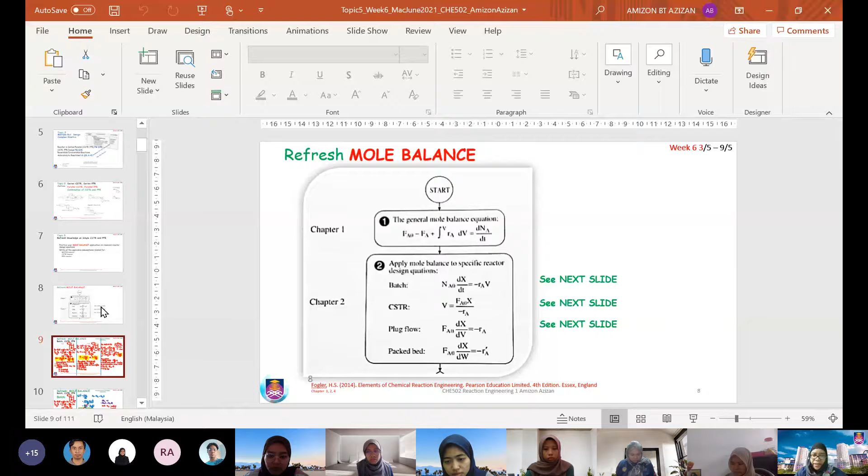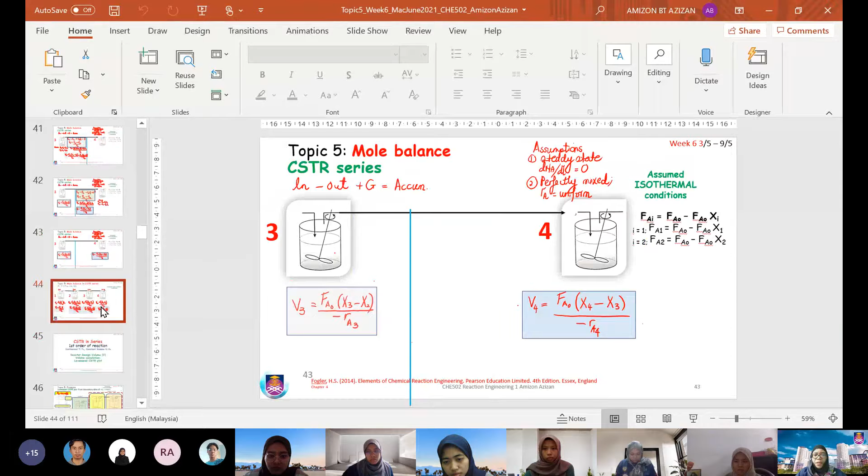All right, so we will start with the class now. I will share my slide. I hope you can already see my slide. I will go straight to the last slide we covered for your class, EH2204K, and I think we stopped here. If you have your notes, maybe you have your scribble on it, and you may remember where I stopped, but I saved it so I know where I stopped.

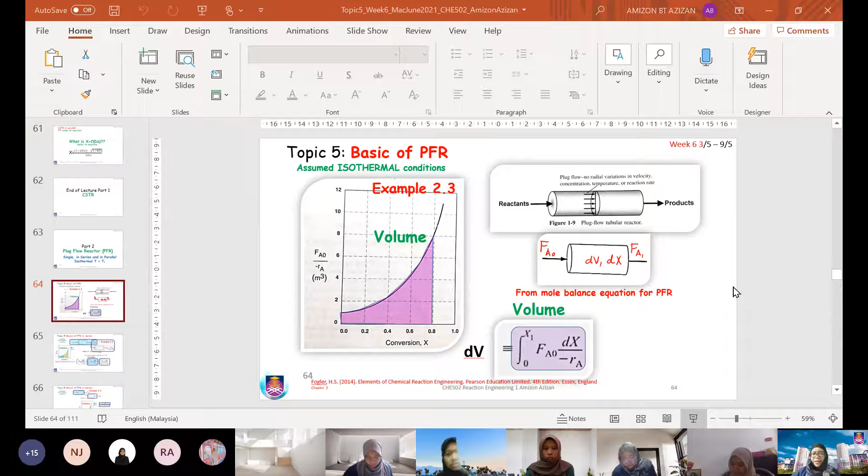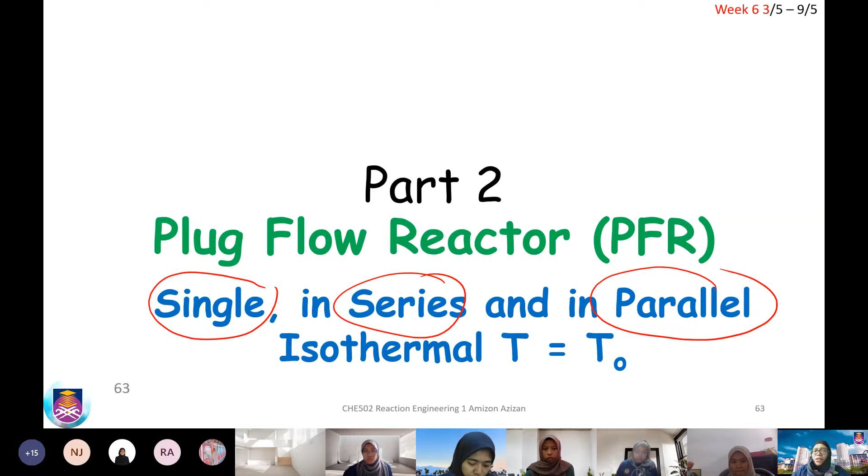Before I proceed, this is part 2, plug flow reactor, PFR, for single, series and parallel configurations. We are going to look into the comparisons between single, series and parallel. I'm going to make it very fast, because we're going to finish part 2 and part 3 today, the second part of the lecture.

After that, I will show you one of the exercises. I will give you some time to scribble your answers, then we will have a Kahoot on that question. Tengok siapa yang jawab betul. But it's very easy. My opinion about this topic is that it's totally easy.

If you understand it correctly, it should be at your fingertips. And kalau you still feel masih lagi susah dan lambat, susah nak fokus, so there's something wrong with something else. Most probably you have to practice listening to English, or practice listening to fast communications, or practice reading a lot more in English, because the engineering questions for topic 5 are very straightforward. All right, so we will proceed. This is a PFR.

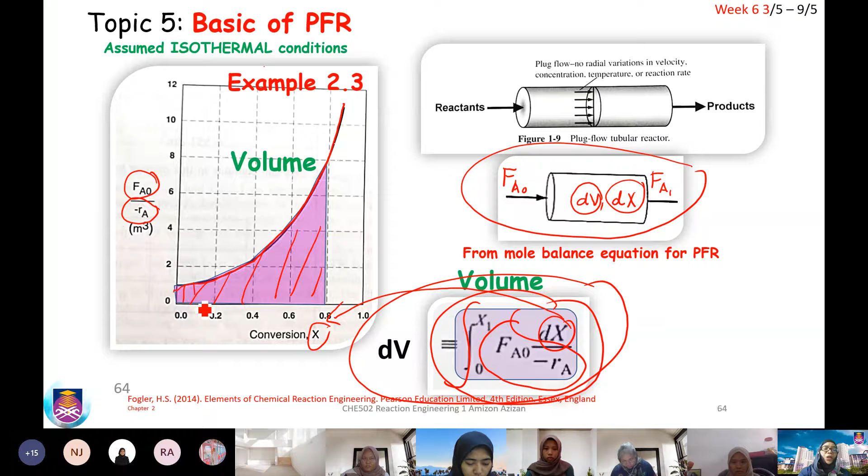As you know, to determine the volume of the PFR, we will use the integral form, and therefore having that plot of dx versus the initial molar flow rate to the reaction rate will give you an ascending trend, whereby in the plug flow reactor there will be change in the x and also the volume. To determine the volume, simply by the understanding of the integral form mathematically, you can decide the area under the curve. So this is what we're going to do.

And now we are going to compare it with, let's say, two PFRs in series, PFR number 1 and PFR number 2. You have initial flow rate FA0, then FA1 coming out from reactor 1, then it enters reactor 2, and here you can write it as FA2, a little bit of typo there, FA2 coming out from reactor 2. So we have two integral forms. If you use the same plot by the variation of x, the conversion, the x for the first plug flow reactor is achieved at 40%. Then after the second plug flow reactor it will increase to 80%. So we have 0.4, 0.8.

So to determine the volume, the total volume of PFR1 and PFR2 is simply the addition of the, sorry, hold on.

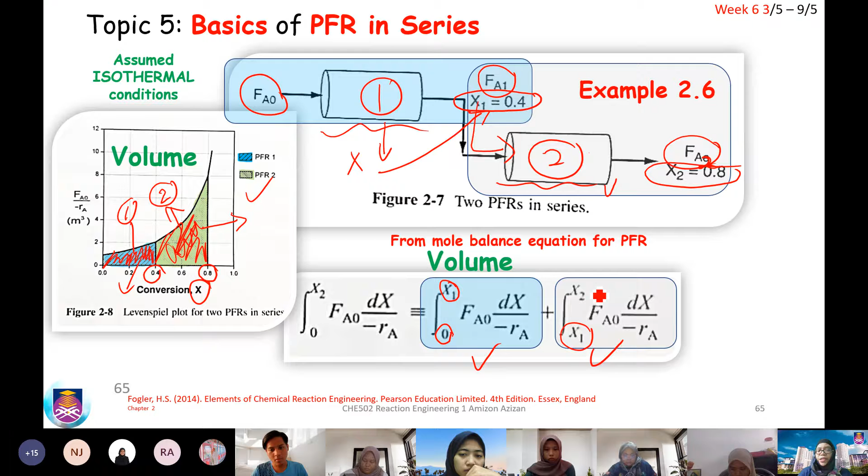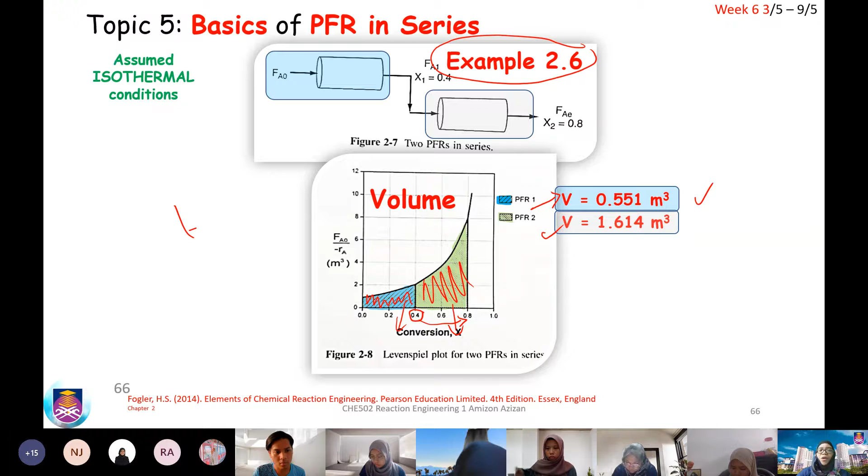Now, to speed up, you can read from your Fogler 4th edition, example 2.6. The calculated area under the curve would give you the first volume 0.551. The second volume is 1.614 meter cube. So you can see that volume 1 is lesser than volume 2. If you go from conversion 0.4 to 0.8, it needs more volume in comparison to 0 to 0.4.

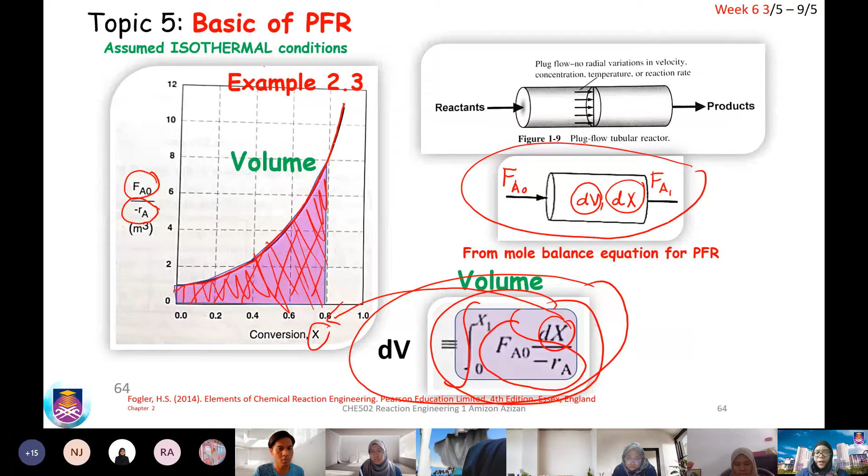So now you can say that if you compare a single PFR to series PFRs, the total volume as calculated is the same. Let us go back, did we do that before? It is not shown here, but the single one will give you the same volume, which is on slide 67. So the calculated volume for a single PFR is the same as the two series PFRs.

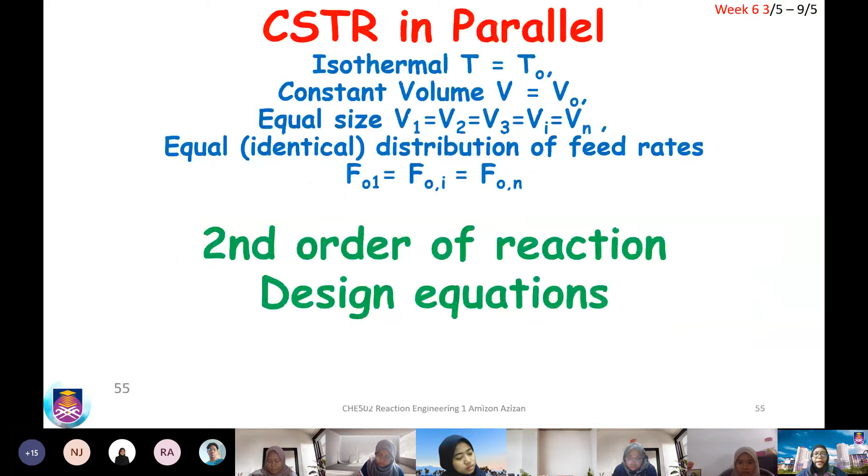In comparison to our CSTRs in series, if you go back to our previous slide, not sure which number, but I'm gonna scroll back. All right, this one, page 47, the single CSTR volume is way higher than the series CSTR volume. So you can try this from example 2.2 and example 2.5 for CSTR.

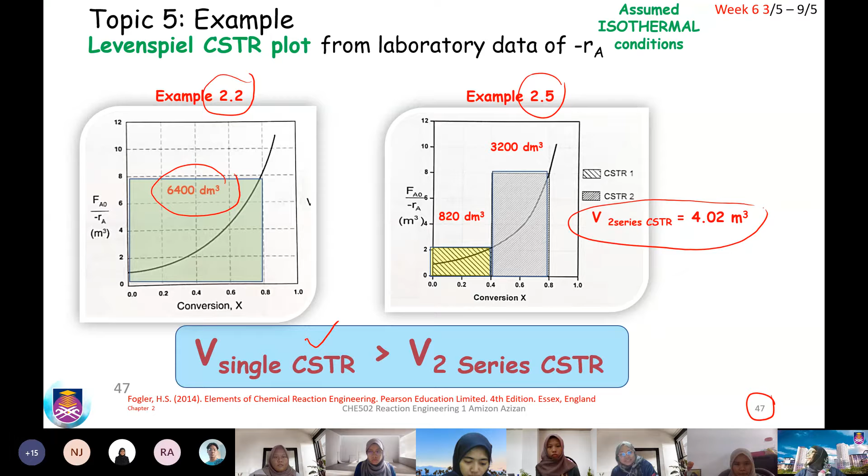All right, Afsar, okay? Shafika, okay? Nada, okay, no Nada. Okay, then.

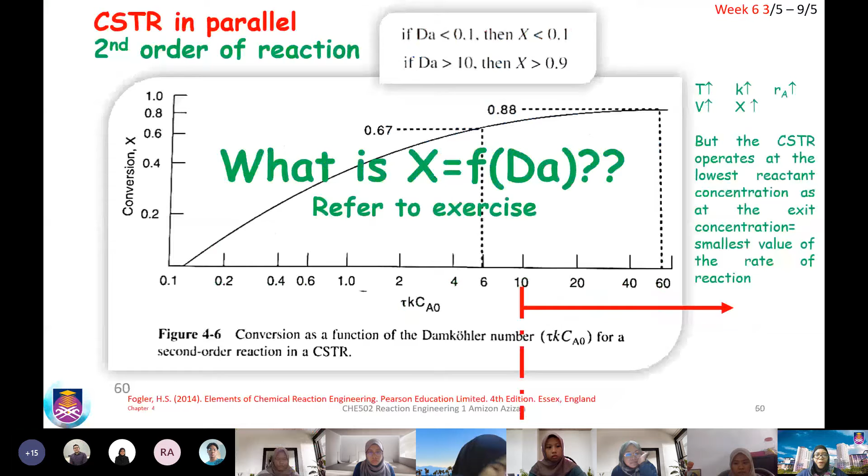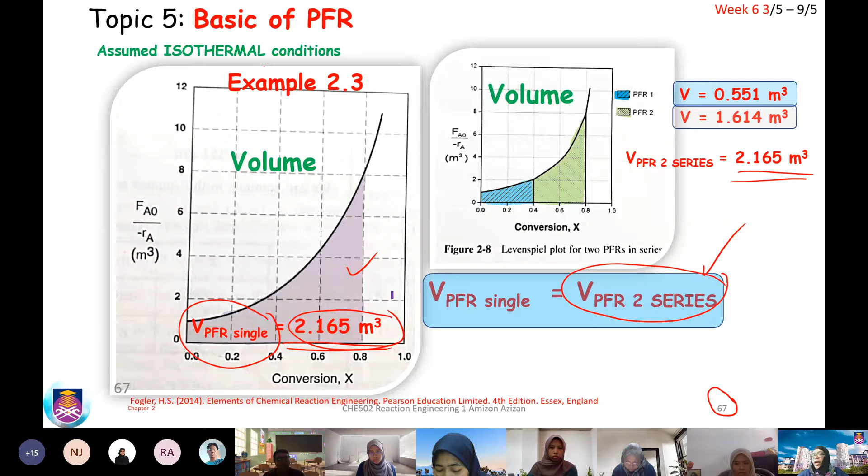All right, thank you. So we are going to go forward to the last slide, which I touched. This one. So now we're going into PFRs in series in writing the formula. Basically, I started with showing you the calculated volume based on the area under the curve. So here I go into detail how we do that. We normally start with the formula, which you have done for the last few weeks, the derivation of the formula, and you know that the volume is simply the integral form.

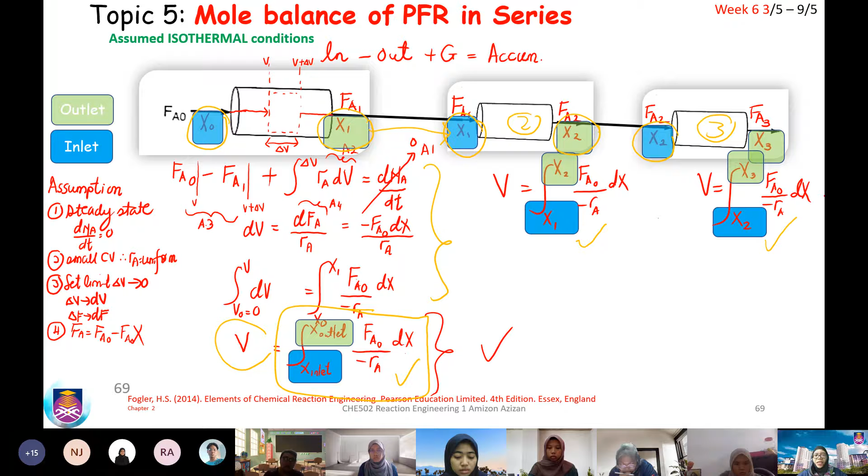So this is just an illustration of the inlet with x0, then the outlet, the green shaded x1, then x1 becomes the inlet now. I purposely changed the color of the inlet and outlet to make it clearer. So we have X2 as the outlet from reactor number 2, which becomes the inlet for reactor number 3. So you have those series of formulas for the respective reactors in series, reactor 1, 2, 3.

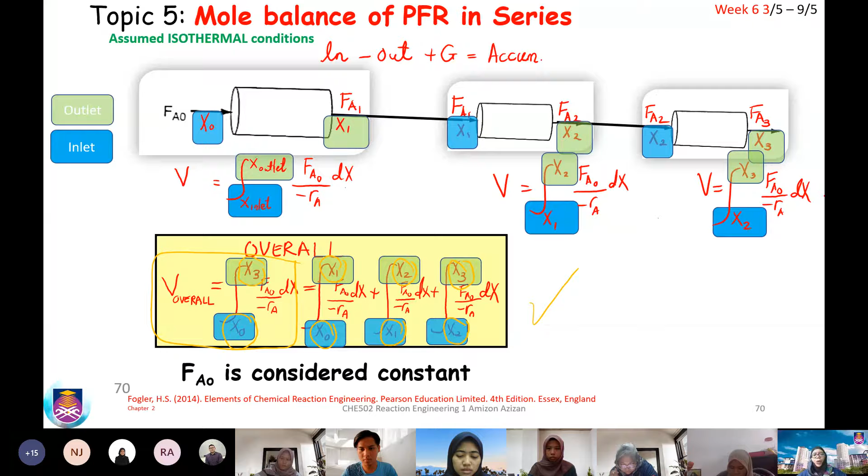All right. This slide 70 is just summarizing the formula that you have for the series. For example, here we start with x0 to x3, that would be the overall. It's simply the addition of the integral form for the first reactor from x0 to x1, then from x1 to x2, then from x2 to x3. So please do understand how you write the integral form in series respectively.

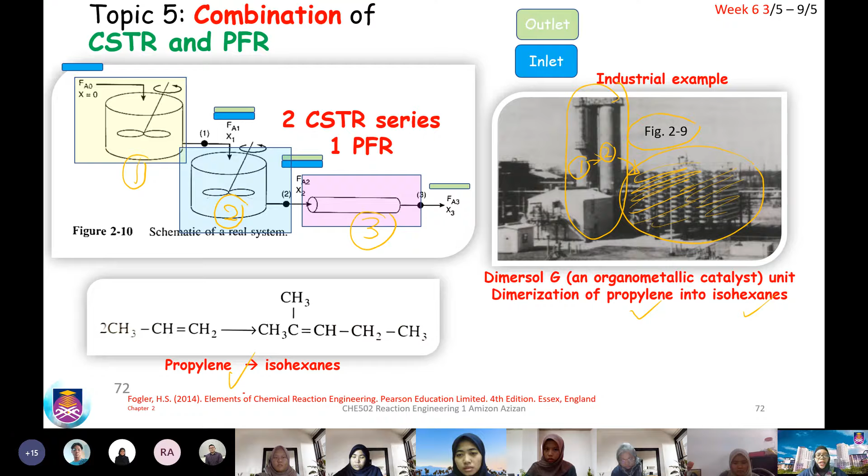So this is done for the Dimersol G organometallic catalyst unit. It's a dimerization of propylene into isohexanes. Another example of the application of a combination of CSTR and PFR is propylene to produce isohexanes. So this is what you see as an engineer. You know that you're going to design two CSTRs with the PFR. Now you need to know what would be the size of both the CSTRs and also the PFR.

So we have learned earlier the basic formula for the CSTR is the initial flow rate with the initial conversion, which is 0, over the rate of reaction inside reactor number 1. Then if you need to achieve a certain conversion for the first reactor, you multiply it with X1 for reactor number 1. So we have FA0 entering, then FA1 leaving. Then FA1 is now the inlet for reactor number 2, volume V2, with targeted conversion X2. And you have the outlet as FA2 with the targeted X2.

So therefore, this is where the series principle formula is used for the volume calculation. So we have FA0, still FA0, divided by the rate of reaction in reactor number 2, times the outlet targeted conversion minus the inlet conversion achieved from the first reactor. So it means X2 minus X1. All right.

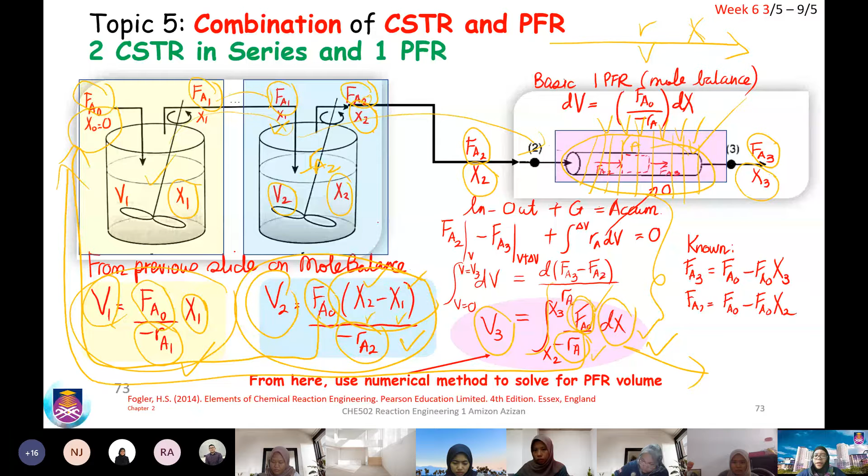Since the second reactor is a CSTR, you do the same thing, X times Y. So how do you determine it? Since you choose this one as the targeted X, X2 for reactor number 2, that point will give you the Y value.

And now the third reactor is PFR. Since it's a PFR, we simply determine the area under the curve. So how to do that? You have to use the numerical method, which you learned in our previous class. So this is mentioned in slide 73: use numerical method to solve for PFR volume.

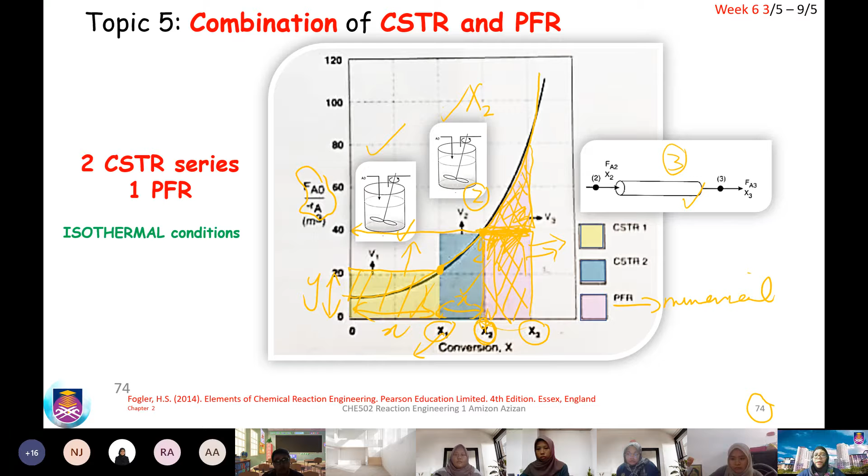Alright, so this is an illustration of how you write the formula. The first formula, the yellow shaded area for reactor number 1, is the volume formula for CSTR. The second one would be the volume formula for the CSTR again, since we designed it as such. And the third one is the formula for the PFR. So this is what I'm going to test you today in Kahoot. A very simple one, so please take note. Should be very easy. Do you have any question before I proceed?

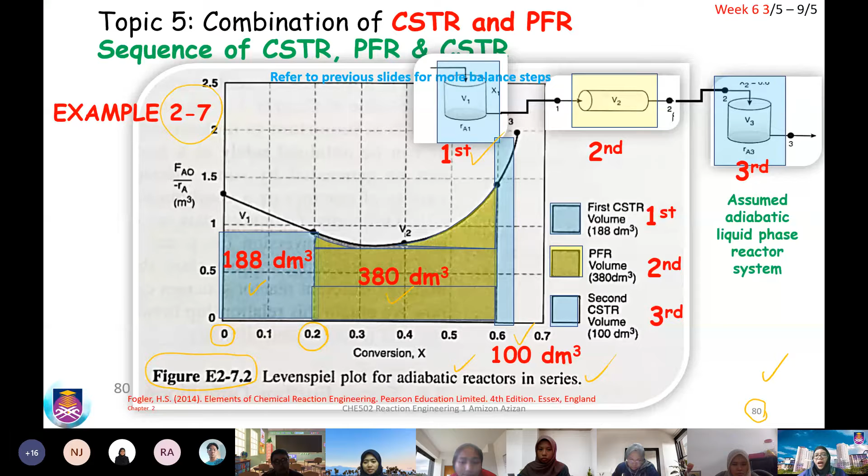And on slide 80, we tried it with the CSTR as the first reactor. Why not try a PFR as the first reactor instead, to achieve the same conversion of 0.2? Logically, if you compare based on volume, for the PFR we have to add an additional area there. For the CSTR, we just need that shaded area. So the total yellow shaded area is way bigger than the blue shaded area.

All right, do you have any question here? So we can say that the volume for the CSTR is lower than the volume for the PFR. Do you have any question there? That is our first conclusion. If you were to compare between the two types of reactors in the sense of volume, then you may say we need higher volume if we use a PFR rather than a CSTR, with that range of conversion.

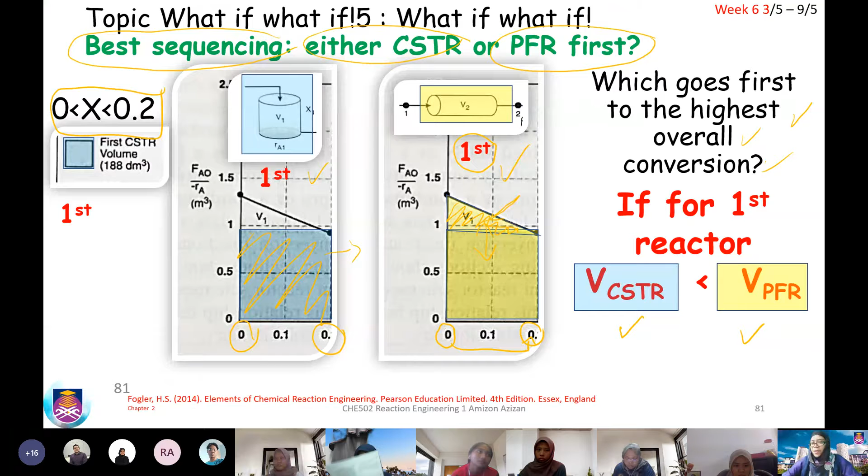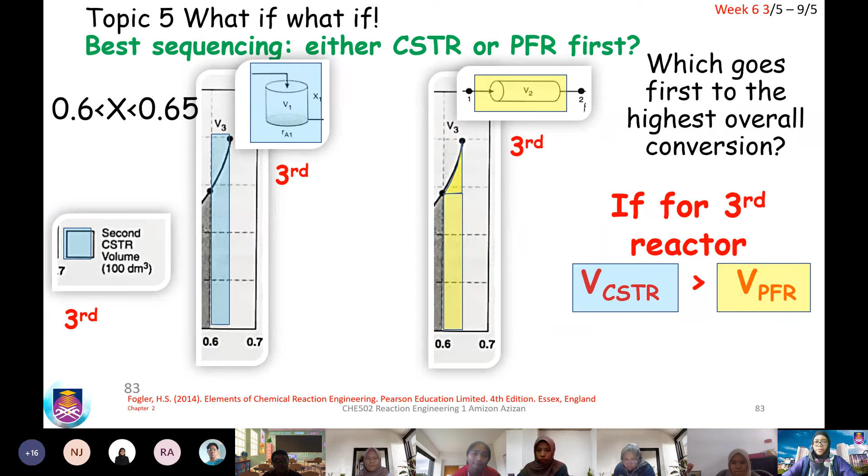All right. Then we go to the next one. For the third reactor, we earlier chose the CSTR. Now, if we were to choose a PFR from 0.6 to 0.65, you can say that the volume for the CSTR now is greater than the volume for the PFR needed for the third reactor for that range of conversion.

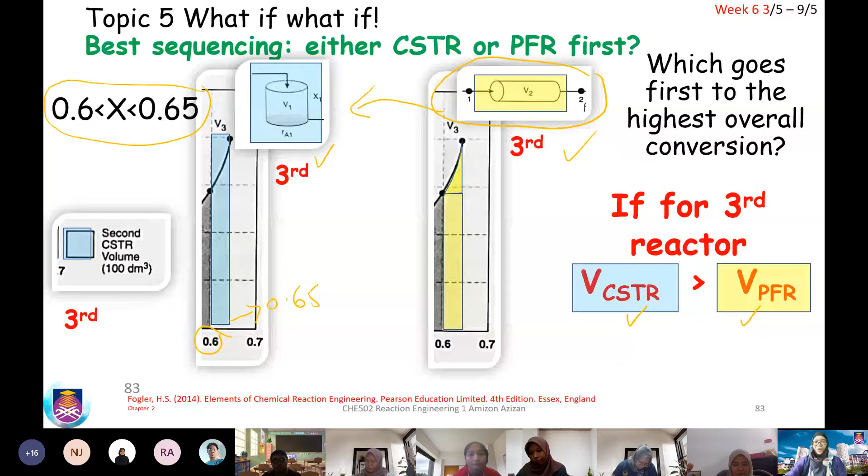Okay, Mashita? Najwa, okay. Okay, Doktor. All right. So, I'm going to proceed with part 3. If you have no questions... you have any questions?

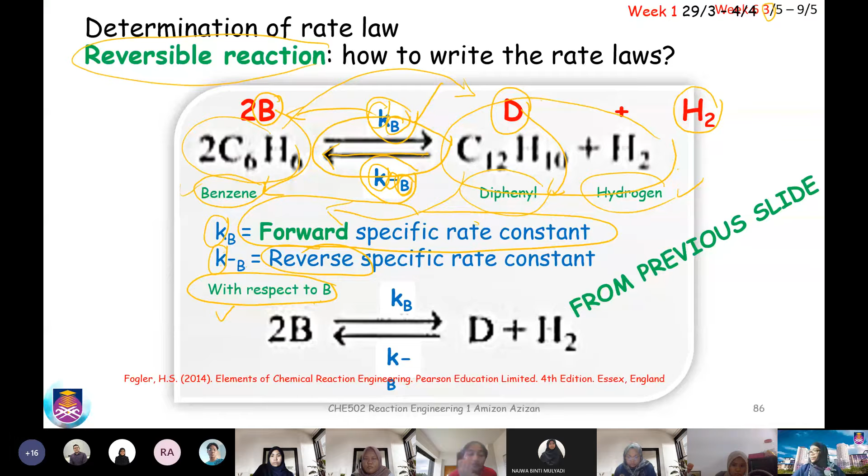Now, this is again from our previous slide in week 3. Take note of how we write the rate of disappearance for the forward reaction. So the rate of disappearance of benzene forward is simply Kb times, since this is elementary, Cb, the concentration of benzene squared, because we have 2 moles, all right?

For the reverse, we bring the negative sign to the right, because on the next slide we want to add that to the net rate of formation of benzene. It's simply RB forward plus RB reverse, without the negative sign there. That is why this equation is purposely written, so that you can substitute it into the net rate of formation equation.

For the rate of formation in the reverse reaction, you do the same thing, but now we use K minus B. Since it's reverse, the reactants are now diphenyl and hydrogen. So we have CD to the power of 1 for 1 mole of diphenyl, and the concentration of hydrogen to the power of 1 since there is 1 mole of hydrogen. Okay. So simply substitute those 2 equations and you'll get your net rate of formation equation.

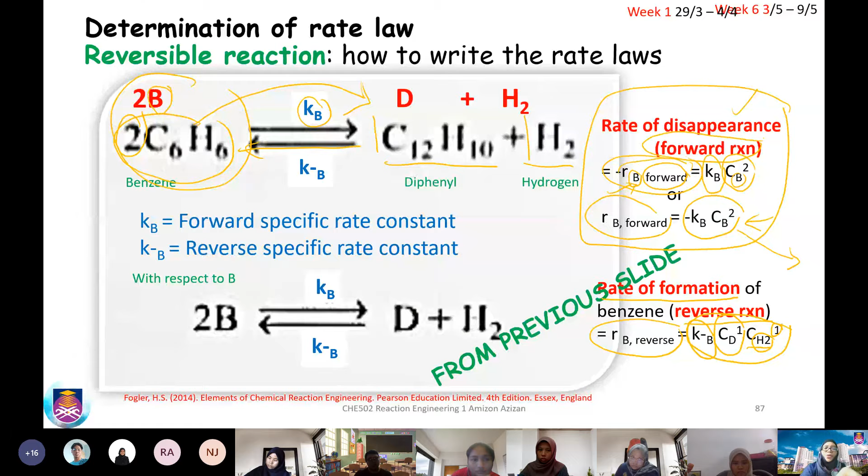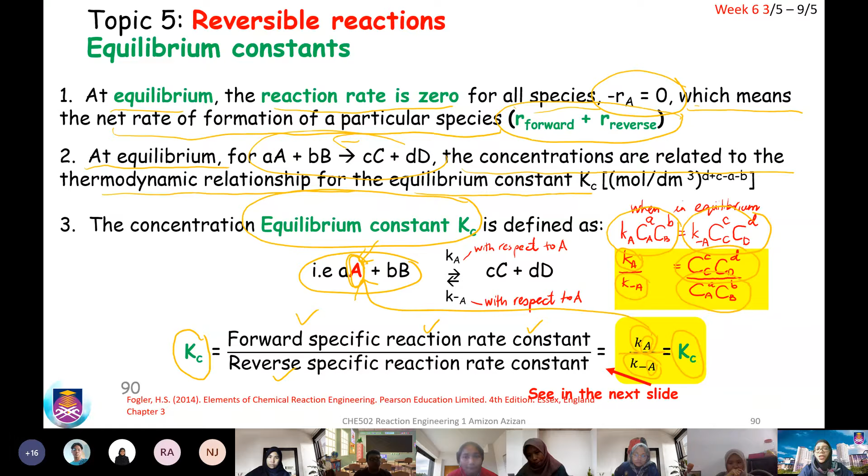So in a reversible reaction, what happens at equilibrium? At equilibrium, the concentrations are related by the thermodynamic relationship for the equilibrium constant. At equilibrium, the reaction rate is 0 for all species, which means the rate of formation of a particular species is R forward plus R reverse. So this is how you write the equation for capital K, the equilibrium constant.

Since the equilibrium constant is that ratio of rate constants with respect to A, we now write the rate of reaction with respect to A. Since it's a reversible reaction, you write it based on the net rate of formation, simply adding R forward plus R reverse, and rearrange it so we can write it with K, the rate constant with respect to A. Then you have this ratio, which is simply the reciprocal of the equilibrium constant.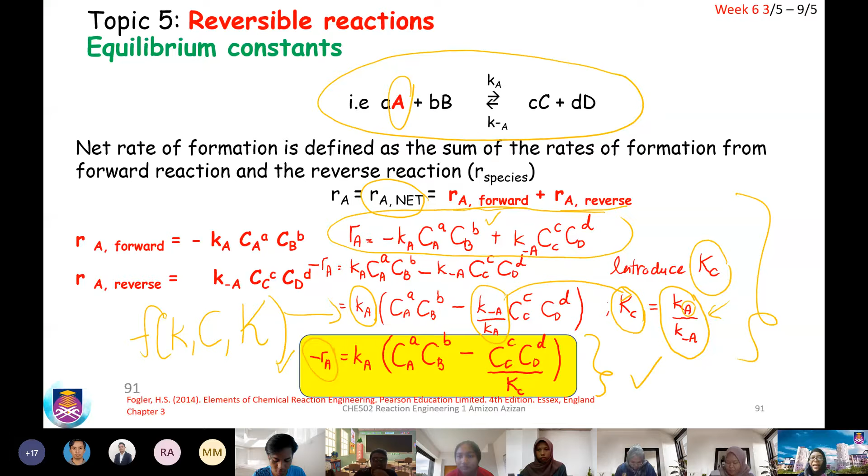When we talk about reversible and non-reversible or irreversible, basically for any reaction, we know that through time the concentration of the reactant will decrease, and at the same time the concentration of the product will increase. You know that, right? But in an equilibrium, the forward and the reverse will meet up at a certain time, according to the reaction rate. Both represent the happening in any reaction, but the right hand side represents the reaction rate according to time. So until a certain time, the forward and reverse will meet up, meaning it will reach its equilibrium state at that particular time. All right.

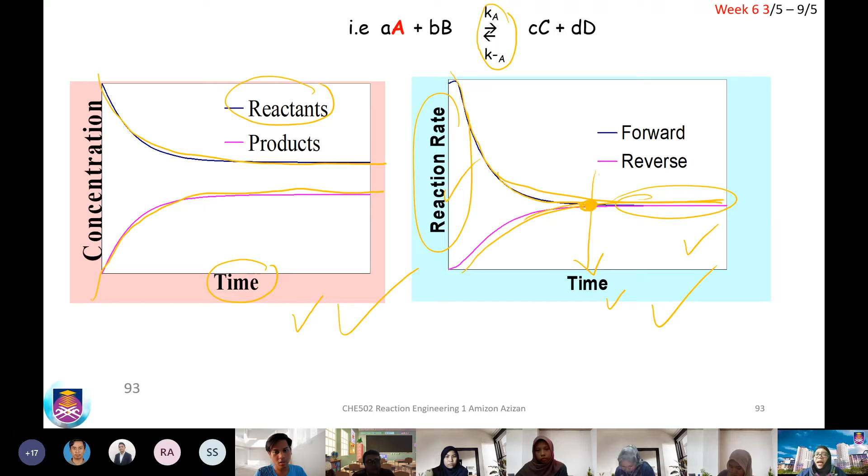This slide 94 shows how we write the equilibrium constant. The first one is based on Kc, which is the concentration equilibrium constant. The C here refers to concentration. Then the P here refers to pressure. So we write it as pressure equilibrium constant, and Kc is concentration equilibrium constant.

You know that for any gas phase condition, the concentration of the gas is actually the partial pressure. So if you are dealing with a gas condition, then you may write the equilibrium constant based on pressure, which represents the concentration of the gas itself. We'll still write based on K forward and K reverse. Doesn't matter if it's concentration equilibrium constant or pressure equilibrium constant, but the equation here is what you wrote earlier for the forward reaction and the reverse reaction respectively.

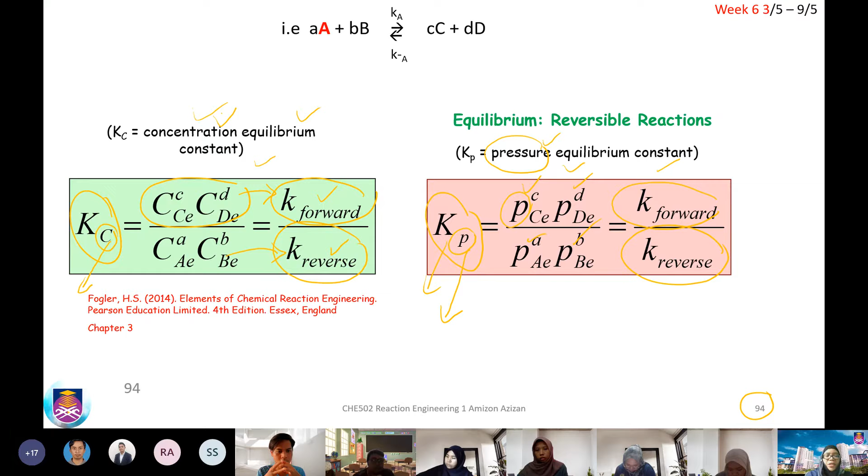Here we have the notation E to represent, just to allow the reader understands, we write the concentration of C, the product component, to the power of C, and E refers to equilibrium. It means the concentration of C at equilibrium, and CDE is the concentration of D at equilibrium. Same goes to the partial pressure of C at equilibrium and partial pressure of D at equilibrium.

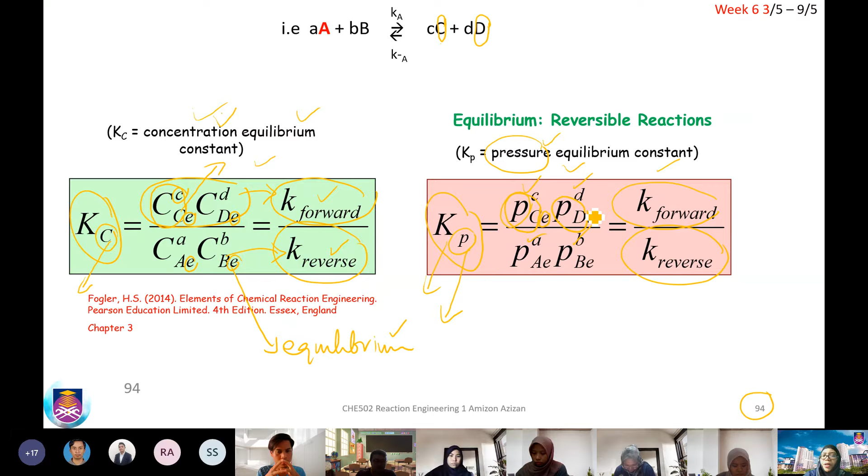All right, so now we're going to enter the last part of this part 3, which is autocatalytic reaction. So what does it mean by autocatalytic? We know that in any reaction, we may have catalysts.

In this case, the example is the decomposition of C2H4I2, 1,2-diiodoethane, either in gas phase, where it simply decomposes, or it decomposes in carbon tetrachloride solution. Other examples would be the hydrolysis of ester or some other microbial fermentation reactions, whereby some of the products are the catalysts for the reaction.

In this case, if you see from the figure, we have two kinds of curves: the first one and the second one. The second has no R in it, meaning A decomposes to product, written as R, and R is also used for the reaction as it increases through time. So those two curves are shown: the first has an initial amount of R already, but the second has no initial R. It simply depends on the R produced. That is just to differentiate between those two curves.

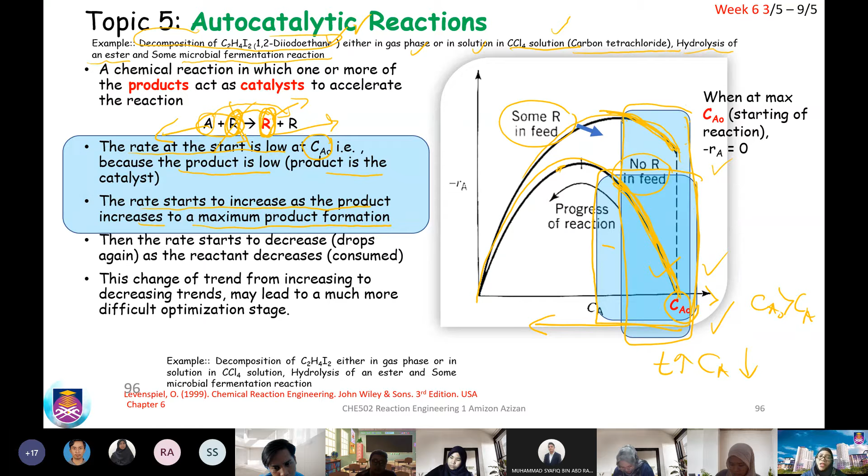So for this one also, you can see that the rate of reaction increases. Let us go to the first one, whereby we have no R there. You can see that the rate of reaction increases when CA0 goes to the left. Of course, through time, the concentration of A decreases. So it reaches a certain point, the rate of reaction reaches a certain point. All right, that is the maximum point there for that curve, for that peak.

All right, and at that specific point, P minimum, P here refers to the product. The rate at the start is low at CA0 because the product is low, and the rate starts to increase as the product increases to a maximum product formation. So we have P max here, whereby the product reaches its maximum yield or production.

Now, this is for no R in it, and this is for some R in it. The same thing: it increases until it reaches its maximum product formation at that point. And also the rate of reaction also reaches its maximum point there.

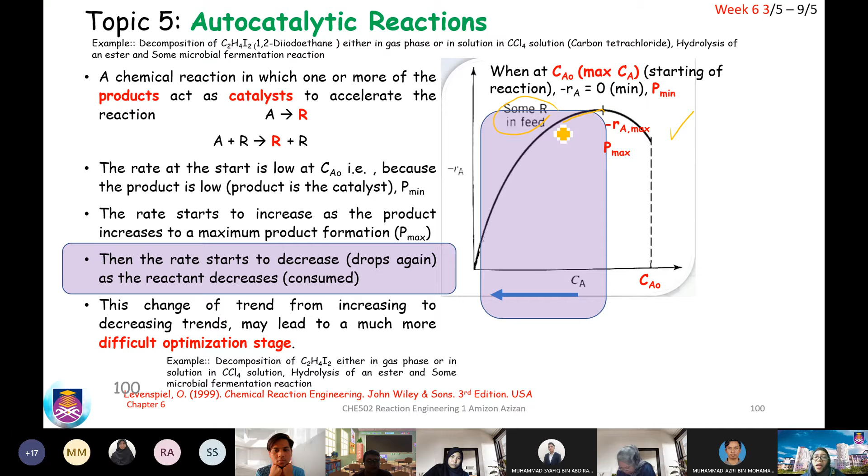The same goes for the other condition, it also starts to decrease or drop. So this is a summary of the overall occurrence during this autocatalytic reaction, whereby the rate of reaction increases to some point until it reaches the maximum product formation. Same goes here, to maximum production. Then it starts to decrease to a certain point as well.

So why do we do that? Do you have any answer? Why do we make this comparison whereby the y-axis is now the reciprocal of the rate of reaction? If you look before, we only analyze based on the rate of reaction, but now why do we want to compare based on the reciprocal of the rate of reaction? Do you have any answer?

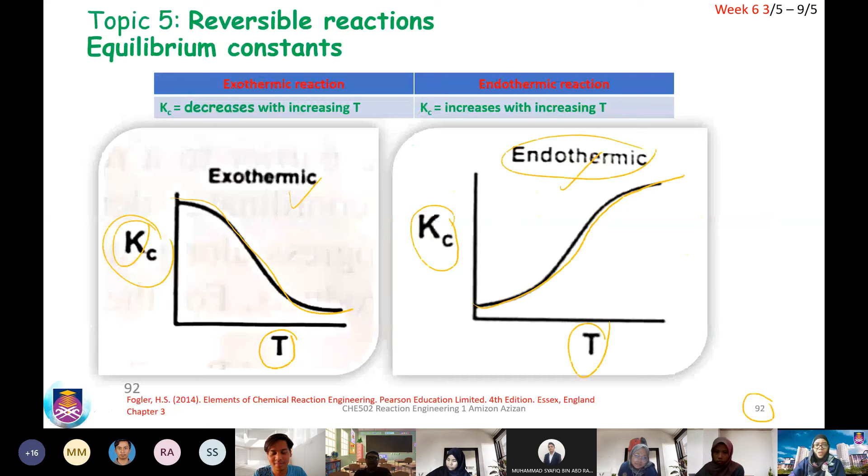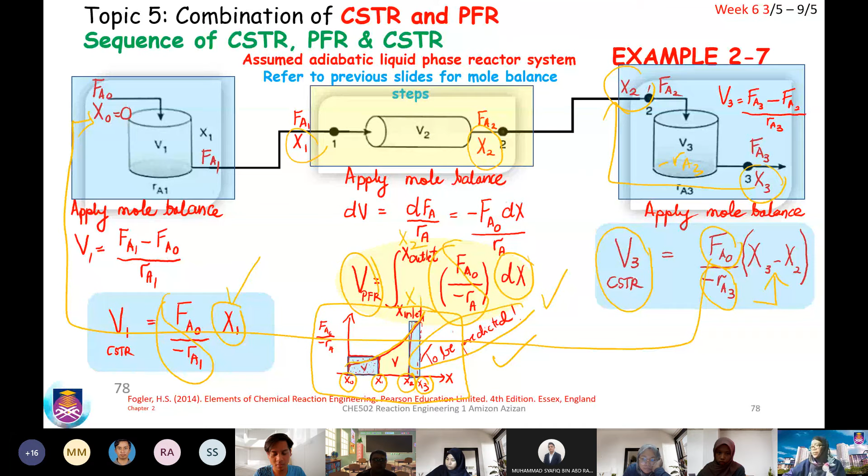Smart, well done Afsar. So let's go back to our previous slide. When we want to determine the volume, we know that for our rate, the volume equation, look here, for CSTR, slide 78. So you have 1 over RA compared with X. Even for the PFR, 1 over RA compared with X. Right? So this is what we have been doing so far.

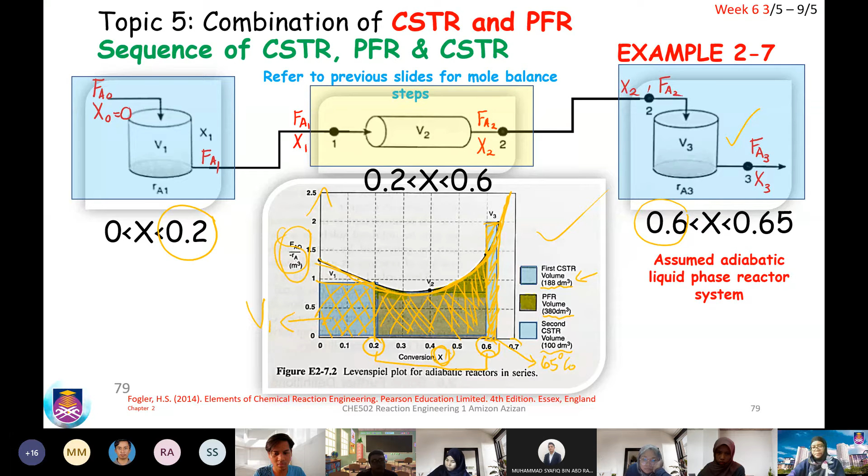The y-axis is the reciprocal of RA compared to the X. So that is why when we want to analyze based on that problem statement, which would be superior for this autocatalytic reaction, regardless of the initial molar flow rate, it doesn't matter, the initial molar flow rate stays the same. So later when you want to compare, this is just generally to answer that question. Once you know your molar flow rate, it's simply a multiplication. This is just to answer the basic question: which reactor is better or superior?

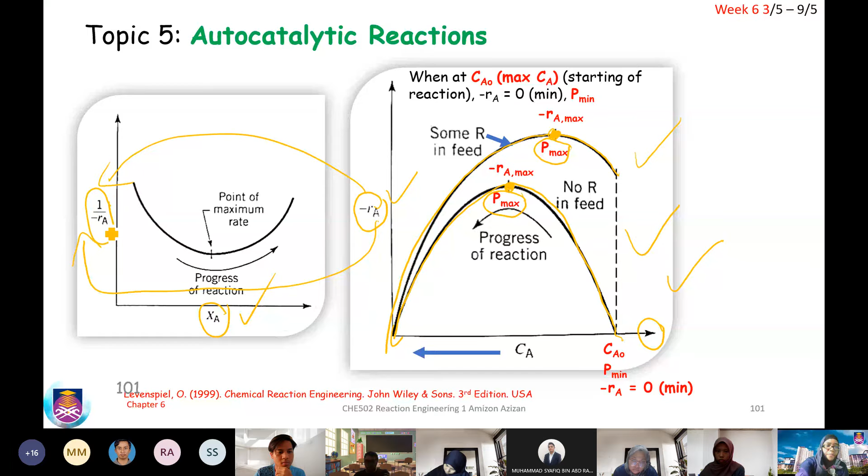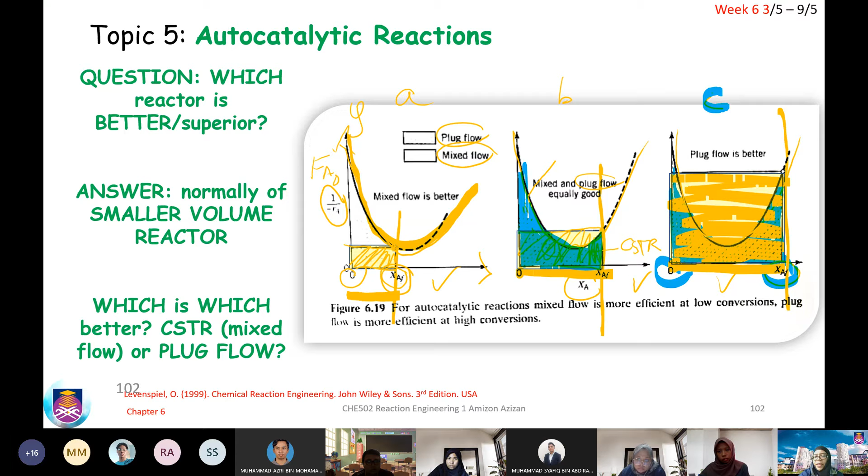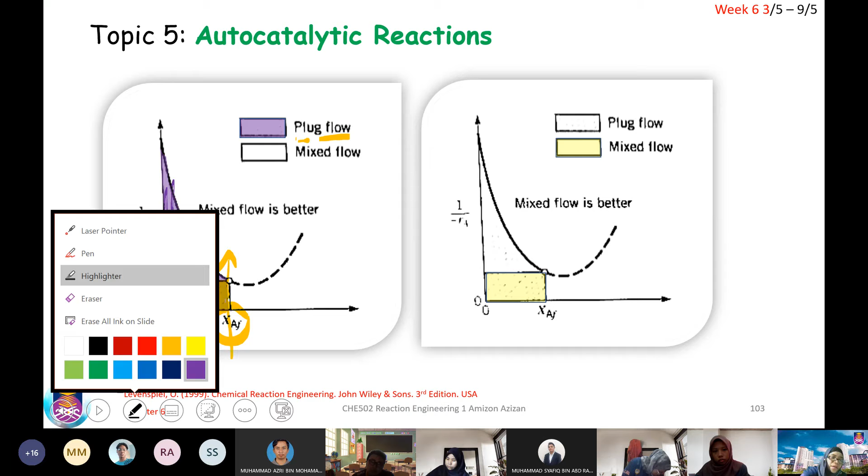All right, so we're going to go one by one in the next slide. If you were to compare the conversion from 0 to that level of final conversion, then the CSTR area would be that area which is lower than the plug flow area, right? The plug flow area is way bigger, as shown by this purple highlighter, right? So we can say the mixed flow is better in terms of volume.

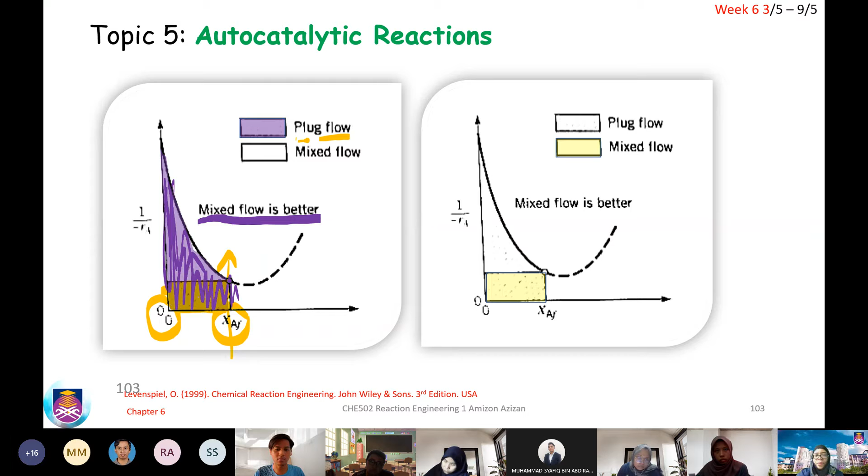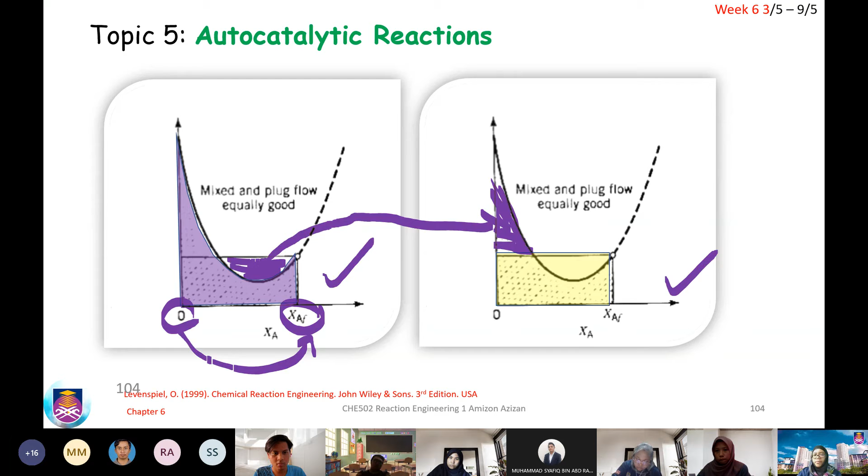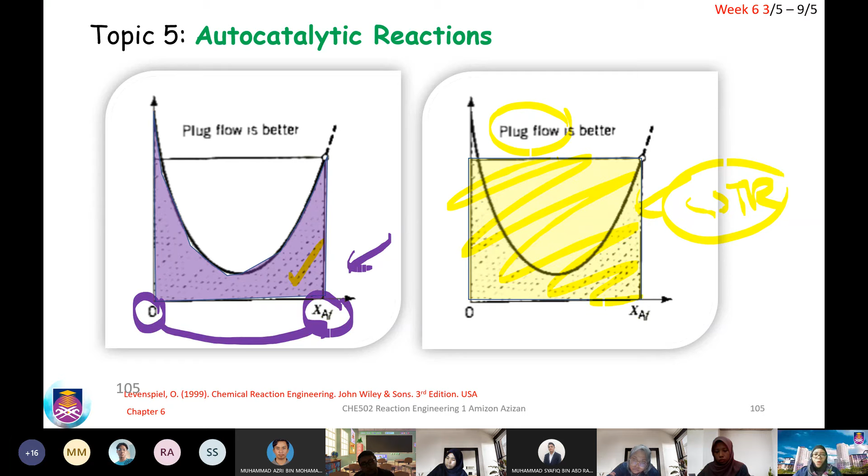If you go to the next level whereby you want to compare between 0 to an even higher level of the conversion, the left hand side will give you the area for the PFR. The right hand side shows you the area for the CSTR. And you know the volume for the CSTR is way higher in comparison to the PFR. So we can say the plug flow is better in this case.

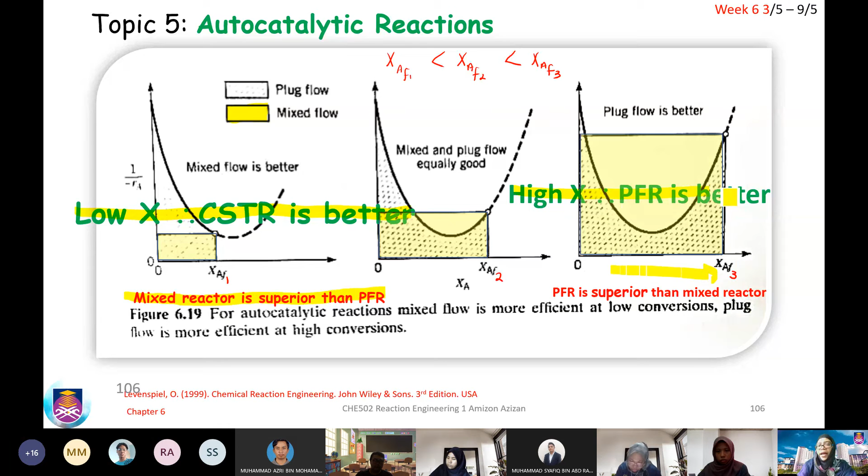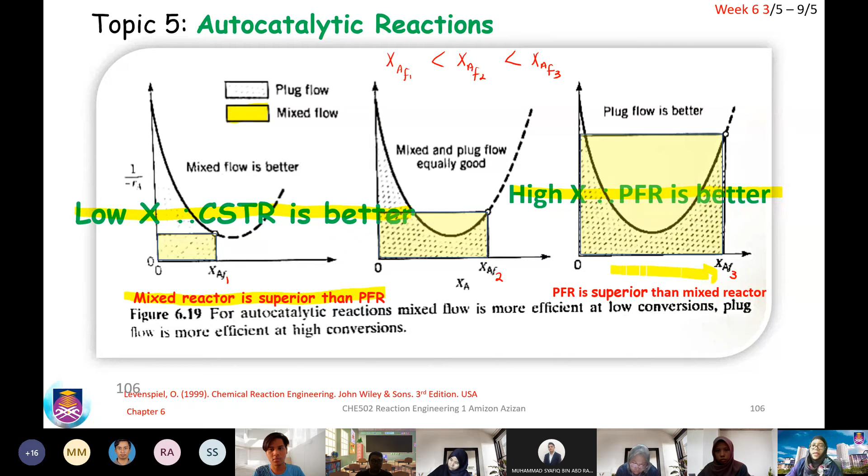So the final conclusion would be the mixed flow reactor is superior to the PFR if we have low X. If you go towards higher X, then the PFR is better because the volume needed is lower than needed for the CSTR. Okay.

And now this will be the last part, just to show you the application of deciding whether you want to go for CSTR or PFR. I'll just go forward with the conclusion. The impact of recycling is minimal volume is operated. Meaning in this case, if we were to use that as a recycling tank, then the mixed flow is chosen. So we have a CSTR with an initial concentration of A. The outlet from the CSTR is fed to another mixed flow reactor or separator or recycling tank, so that you can take out your final product and recycle your unused reactant back to the CSTR.

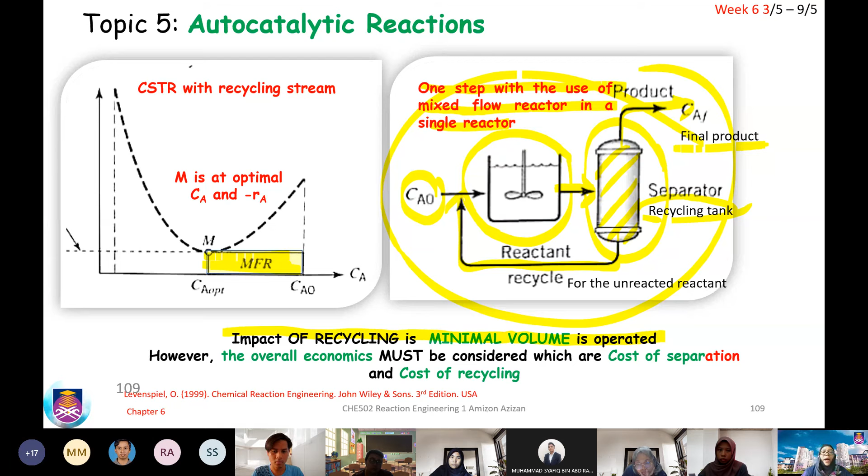So one step with the use of the mixed flow reactor in a single reactor, meaning this whole set whereby we have the CSTR with the recycling stream. We still get the same trend there, achieving a certain optimum level of the concentration of A for this set of reaction, with the CSTR and also the recycling tank.

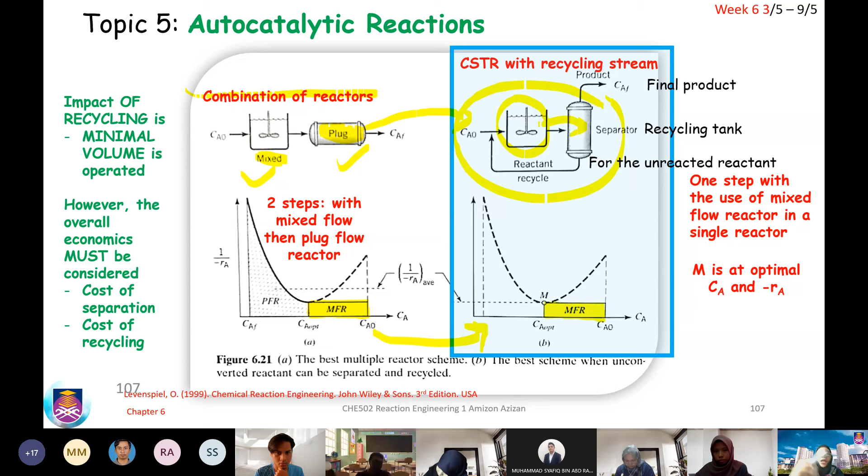All right. So in conclusion, when we have this combination of reactors, CSTR and also PFR, it represents as if we have one set of reactor of this CSTR with the recycling flow. That is just to show theoretically that if we have one CSTR with the recycling flow, it behaves like the combination of CSTR together with the plug flow reactor. Okay, so that would be the end of the topic 5 chapter.

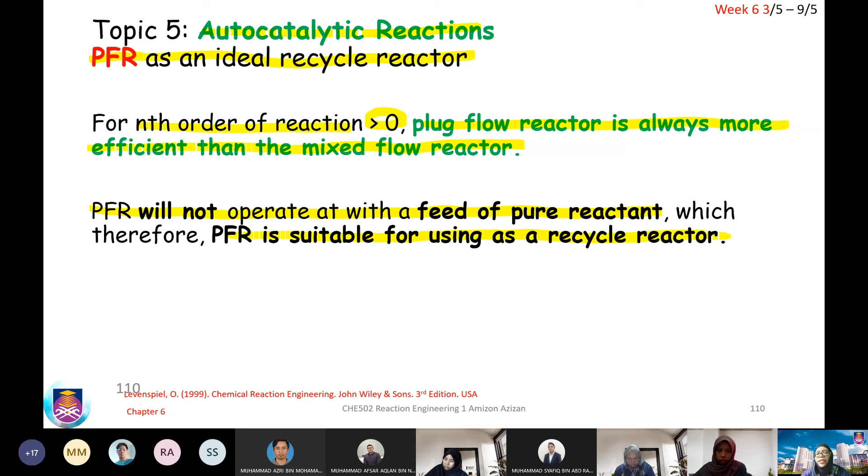But before we end, I just want to end this with the last part of the autocatalytic reaction, whereby you have PFR as an ideal recycle reactor. It says there, for the nth order of reaction greater than 0, the plug flow reactor is always more efficient than the mixed flow reactor. However, the PFR will not operate with a feed of pure reactant, therefore the PFR is suitable for use as a recycle reactor.

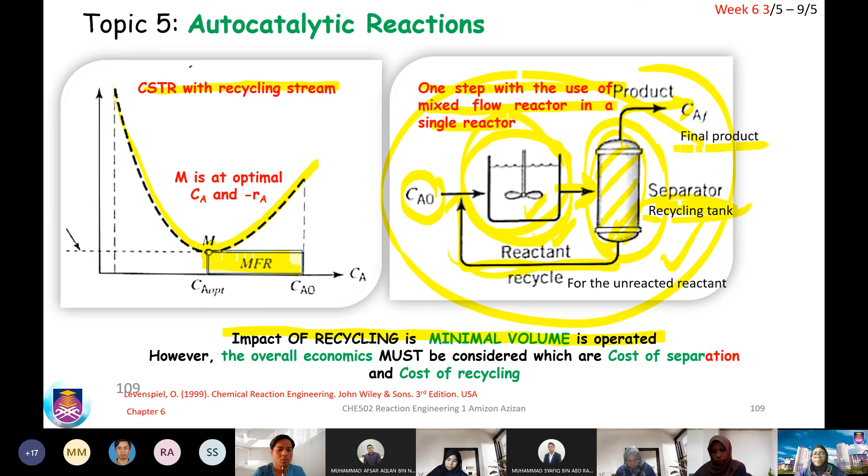So this is what happens here, whereby we have this PFR which behaves like this combination with the CSTR, and the PFR principle is applied for this recycling stream. Meaning since the PFR type is not suitable for receiving pure reactant, that is why it is used for this set of reaction with this main reactor with a recycling stream. Okay, so that will be the end of this topic 5.